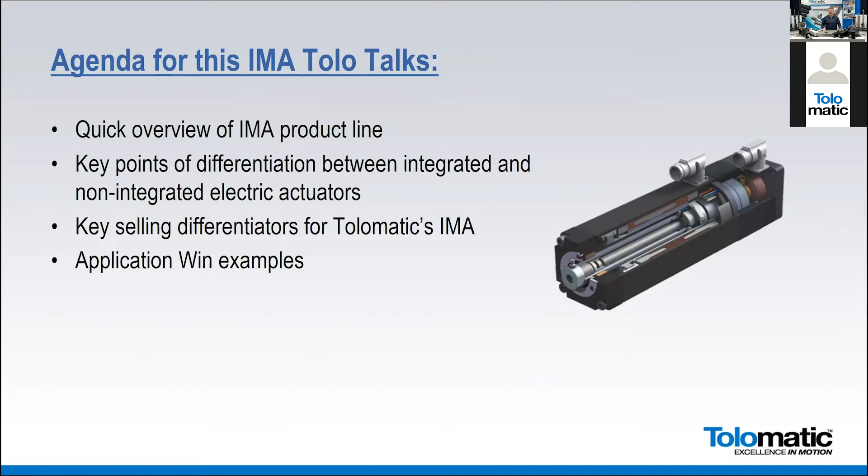So I'll talk to you about some of the differentiation points that we like to emphasize on our IMA. And then we'll get to the meat of it here, the things that you dialed in for, the application wins as advertised. So with that, I'm going to just get going here.

This gets you a nice overview of our rod style actuator line for the electric. You can see the ERD on the, I don't know if that's your left or right, but ERD started out as a very economical version. Then we added stainless steel, and now we have a hygienic line. We're going to actually launch a new line of those larger style hygienic actuators in the second quarter of 2021.

We're excited about that. The RSA on the other side actually has been a staple for us for over 20 years. So this is a tried and true product. We added the HT line about 4 or 5 years ago, and we've always had the GSA, the guided version of that. The RSX is what we've been focused on over the last 3 or 4 years. We built that out with our 80, our 96, and now just recently in 2020, we launched our 128, so we can do 50,000 pounds of force.

And then the IMA, we launched the IMA stainless about a year ago, and then we've had a white paint version that you can get, but we're going to focus primarily on the industrial version of that. So I'm not going to spend a lot of time on the hygienic options here around IMA. We're just going to focus on that top box there with the standard IMA product. IMA stands for Integrated Motor and Actuator.

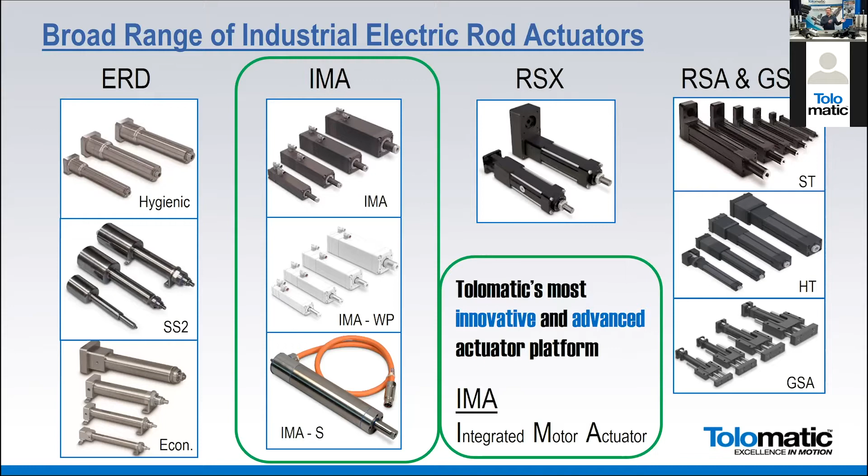So why is that interesting? If you look at the competitive marketplace for the non-integrated version, the ERDs, the RSAs, there are a lot of competitors out there. So there are a lot of folks that make a non-integrated actuator. Not that they don't make it as well as Tolomatic does, of course, but they do have a product offering. So there's a fair bit of competition.

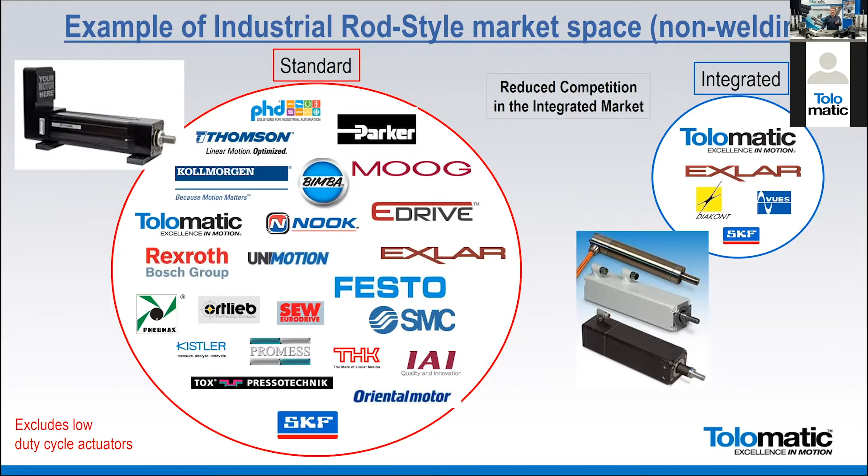But when you get over here to this integrated version, the pool gets a lot smaller. So your competition base is greatly reduced. So think about that when you're out in the marketplace. This is another good reason why you may want to lead with an integrated version, or at least put that option in front of the customer.

To just highlight quickly for you what's going on, our non-integrated version on the top, the RSA24, shows the actuator with that motor mount. This is a reverse parallel configuration, called an RP, reverse parallel. You could also put it inline, and then you'd see that it would extend out. So in either configuration, inline or reverse parallel, the size required for your customer to install it is quite a bit larger for our non-integrated version.

Now, it does give them some benefits. It gives them the flexibility of choosing whatever motor supplier they may want, right? There are also some features of RSA in terms of internal anti-rotate, things like that that are beneficial. There's some gear reductions you can do in the RP to help with your motor selection, maybe downsizing that. You can add a gearbox to it. So there's a number of flexible things that happen in a nice way with the non-integrated actuator.

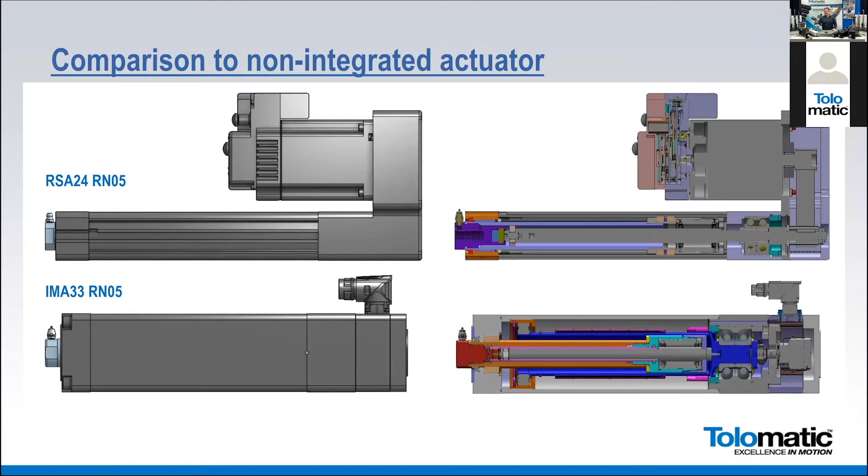But this integrated version puts that motor and that actuator combination in a very tight package. And so we use this on robot carried devices. We use this in places of hydraulic replacement where someone's trying to fit something into an area that otherwise really maybe wouldn't be able to accommodate something like this.

So why should I sell an IMA when I could just sell the RSA? You can double your sales value. That's why. So now, instead of selling the RSA and having customers supply their own motor to it to go on there, here in this case we have an opportunity of selling the actuator and the motor in combination.

Customer can still put in whatever drive solution that they're comfortable with. So if they like Siemens, if they like Rockwell, if they want to use even Mitsubishi, Nidec, etc., we've got a drive capability. We can set up this actuator to communicate and work flawlessly with those drive solutions, and have the motor and the actuator combination tied together here. It also greatly limits the number of competitors, as we talked about, and it's a very compact solution for your customer.

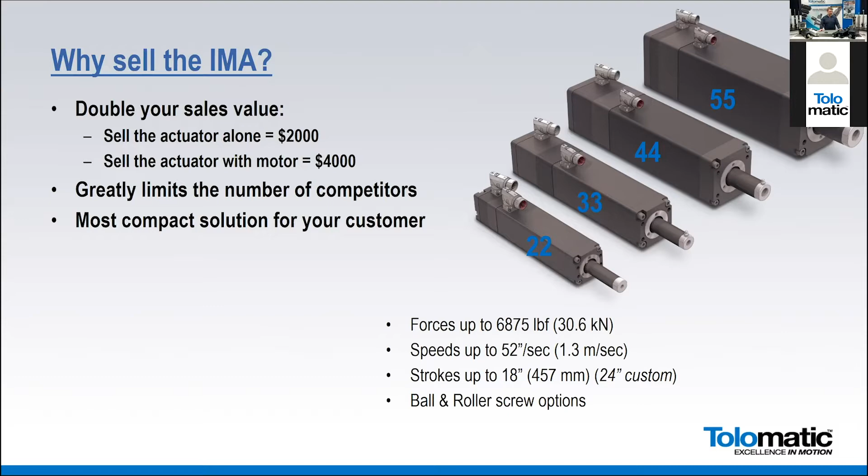So what's going on inside? Seems really complicated. I know this product, I think in general, is something we don't sell as much of because it is very involved. It's pretty complicated and a little bit scary. There's a lot of unknown and uncertainty that kind of makes us feel uncomfortable. So I want to try to demystify that.

Here we've got the servo motor. You can see the red and blue there. So you've got the rotor and the stator built right into the housing. So that's happening all right inside of this device here. It's heavy because of that. You got a lot of copper windings inside of here. But then retracting back inside of that is either a ball screw, or in this case, the picture that we're showing is a roller screw.

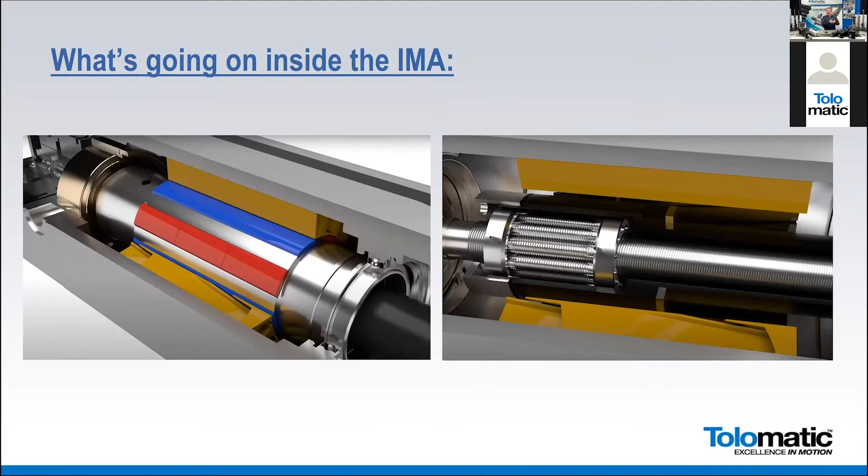So that roller screw is going to get connected to the thrust tube. It's going to extend out front here, and then it's going to retract back, and it's going to retract right back through the motor, actually. So those motor windings spin, and they're actually connected to the back end of the screw shaft, and then it drives that nut assembly with the thrust tube up and back and recessing it inside the motor, and that's what allows for us to make this very compact design.

I'm not going to spend a lot of time here. You can certainly pick this up and look for it yourself, but a couple quick things. We do build this both in a ball screw orientation as well as a roller screw. So if it's going to be price competitive, go with that ball screw. If it's something that's going to really work hard and be very high cyclic application, then looking at that roller screw technology is excellent. We have great deliveries on both of these, 3 or 4 weeks.

With a catalog product, 6 or 7 if you want to customize something, and we'll talk about that a little bit. A lot of different options that come along with that in terms of how you can mount this assembly. These are pre-engineered catalog options, so it allows you to add a brake inside of this. We can do some anti-rotate, a number of different rod end and mounting configurations.

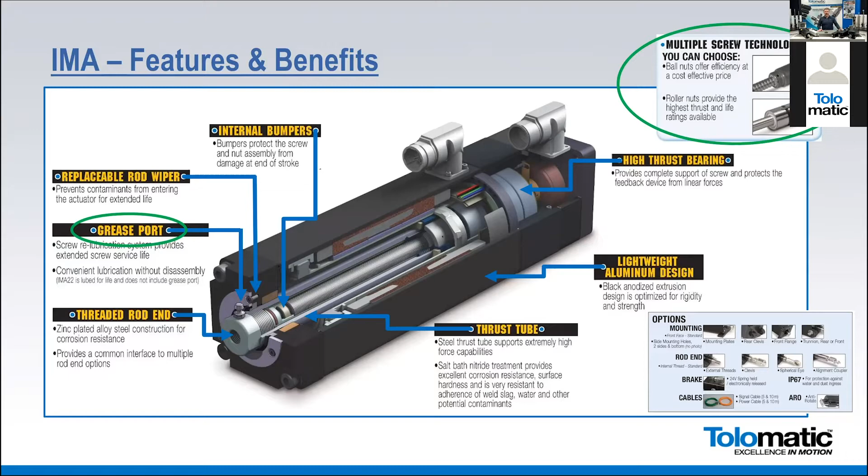So this is what makes this actuator, I think, a little more challenging for you to put out in the marketplace and sell. You say, okay, I've got an actuator, I've got a motor, but now I have to connect some sort of drive to this, and I'm uncomfortable with that step. And so what we're trying to do is make this easier for you.

So these are all the different servo drives and controllers that we have experience with. All of these could be mounted on a Fanuc, KUKA, ABB, or Kawasaki robot. We've got all of that worked out. Nidec drives, Siemens drives, Rockwell Automation. This is an Encompass product, and I'll talk about that a little bit. But we're working hard to make it easy for you to integrate with your OEM. Mitsubishi in particular we'll highlight. We're just in the final process of getting them to coordinate with us so we can use their drives.

We've got 2 applications out in California actually that we're working on, very excited about, with integration of a Japanese drive, which, if you may or may not recognize, can be challenging. A lot of that's very proprietary, and they don't play nice with others all the time. But in this case, we've been able to get our 2 companies together and work out the differences. So a lot of capability, a lot of flexibility.

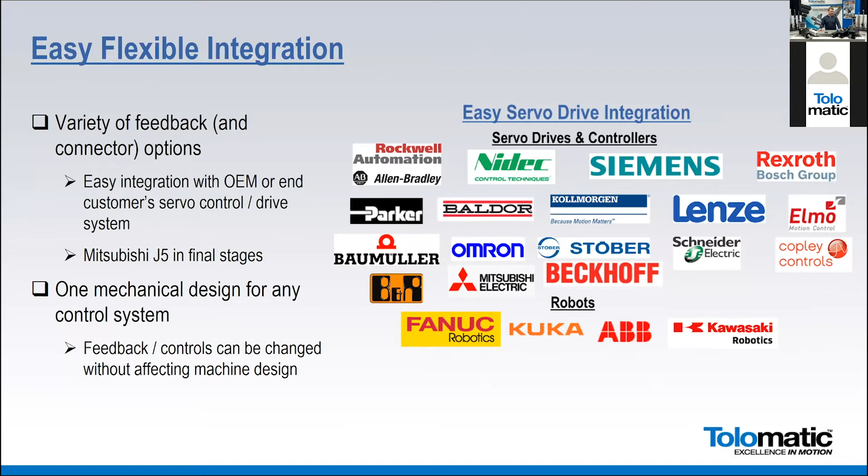Most of your customers are using one of these sort of drive solutions and control solutions that I'm showing on the screen today. So how do I get help on that? I'm confused. My customer is concerned. Go to our website, find our IMA page, and then click down and you see we've got this Drive Integration Resource tab. You click on that, it pops up this open screen that you see on the other side.

Here we have all the integration information you need, and we're starting to build this out. We just added this a month or 2 ago, so you're going to see more and more of this. Our product manager, Mike Wolfel, is working on it. We've got a lot of good information on Rockwell. We do a tremendous amount of work there, and they have 60+% of the market in North America. So here's a case where you could sell to a customer that prefers Rockwell, get the motor solution and the actuator, and then allow them to get the drive and the controls and everything else from their Rockwell provider.

Here, Siemens drive integration, we've got a lot of that worked out. Nidec, and I'll talk about that in just a minute. We've got some interesting options for you there. And then Mitsubishi is coming soon. We're working out the final details. That should be added in the next month, maybe two. So, all right. The Rockwell Automation we talked about here. The seamless integration with Kinetix servo drive.

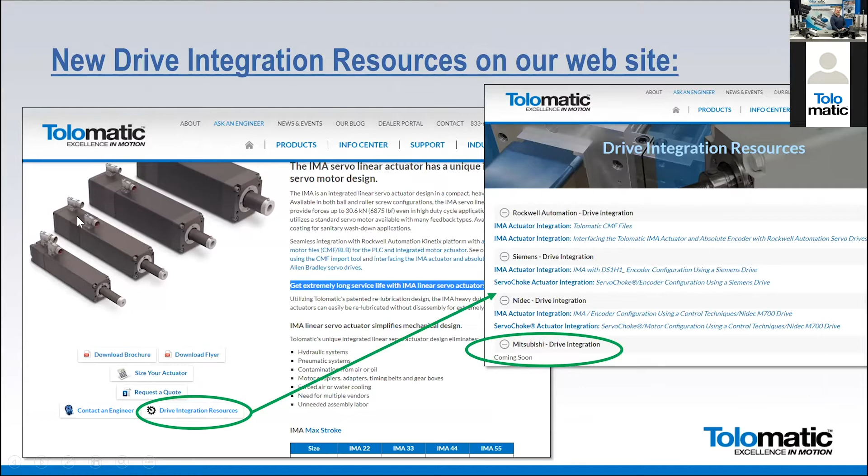So something that isn't maybe as apparent, you can look here. You see all of our pictures have two connectors on the back end. One's a power connector and one's a control connector, the drive feedback information. Now you come here and you're seeing a single connector. A number of the drive manufacturers are now offering a single connector option, and we have done that already. It's already pre-engineered in our Rockwell configuration. This is available only from Tolomatic at the moment on our IMA product with a single connector. So a point of differentiation.

We've also got stroke configurable. So if they wanted 4 inches, 9 inches, or 10.5 inches of stroke. These are differences that can help separate Tolomatic from some of the competition. Exlar is going to try and sell them in fixed stroke lengths. Exlar has the 2 connector right now; they're working on the 1 connector. This is another way of differentiating and showing them that we have an Encompass partnership. These are Rockwell enabled. These will look like Rockwell motors in their drive software. So none of your customers should feel uncomfortable connecting it to a Rockwell drive, getting it up and running very quickly and easily.

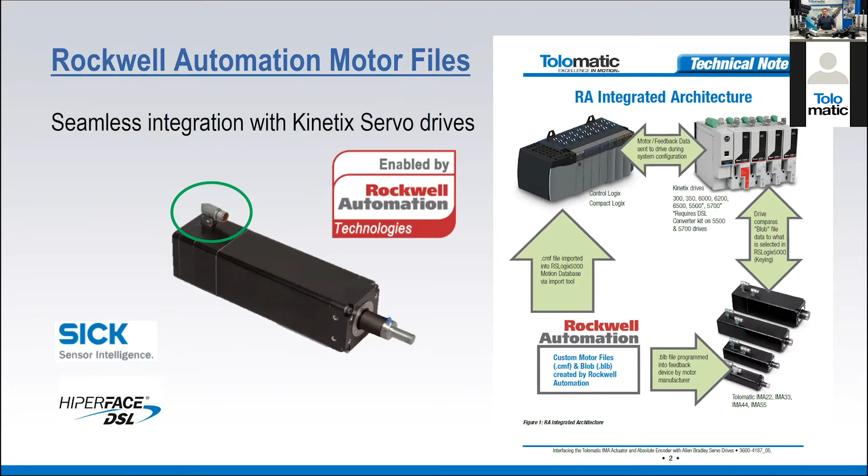So, all right. Nidec. We haven't officially announced anything here, but we've got a partnership that we started forming with Nidec. They're allowing us to resell motors and drives for our actuator solution. So if you've got a non-integrated actuator, we're going to connect a Nidec motor to it and have a drive run that solution. And if you want to sell our IMA and you want to get the drive solution, we can work with you on that as well. They have a new software that they launched, similar to what they used to have, called EZ Motion. Our applications engineers have been trained on that, and we've got some documentation to help you make that simple for your customers.

And that EZ Motion drive with Nidec used to be Emerson, used to be Control Techniques. It's been through a couple different acquisitions. So your customers may recognize Control Techniques and feel more comfortable with that. It's a Control Techniques drive sold through Nidec. We can help them integrate that, and then they can send it to whatever PLC solution they want to use for controls. So now you not only get the actuator and the motor, you can also add the drive solution to that.

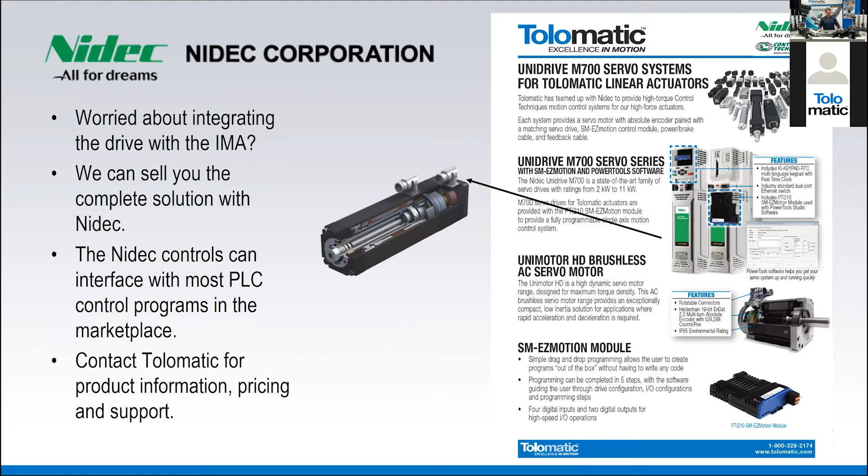Just a couple key points of differentiation that I wanted to highlight with you. Our actuator looks similar to the other 2 to 4 competitors in this integrated actuator space, but there are a couple important differences that I wanted to highlight with you. So part of it's this skewed versus segmented stator winding. I'm going to talk through that in a little bit more detail. We have a low electrical time constant. I'll talk to you about that.

And then I don't have a slide. I took it out just in hopes of being on time here. But we do offer our standard roller screw and we offer ball screws. We do not offer inverted roller screws. But if you do some research, our ball screw dynamic load rating is very similar to our inverted roller screw dynamic load rating. So the life expectancy you're going to get from these 2 products is going to be very similar. And we've had a lot of success converting inverted roller screw customers over to a ball screw and getting essentially equivalent life in their performance.

So just a note to help you navigate going forward. Or if we need to get a little more aggressive on the standard roller screw pricing, we can explore that too, since Tolomatic's been making our own roller screws for the last 7 years or so. We've got that core capability in-house. Other things you want to make sure that you highlight with your customer, you're not going to get this product from anyone faster, right? So we can ship these in about 3 or 4 weeks as standard. That's a lot faster than most of the competition.

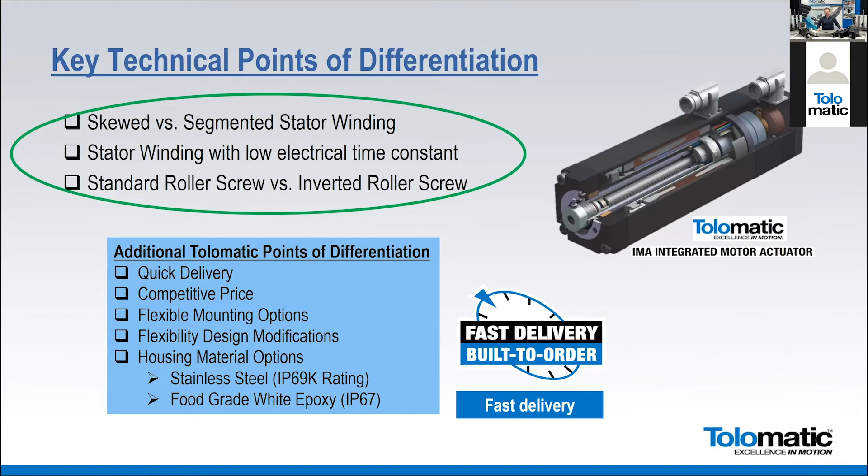Competitive pricing, we have a lot of experience putting this up against the competition. We know where the market's at. And our pricing is competitive on these. Got a lot of different options here that we've talked about. And then we've got, of course, if you're in the food or a pharmaceutical application, you can move them towards this white paint type of solution, or our new all stainless steel integrated motor actuator solution that we launched about a year ago.

It's a little more expensive, it's a little bit longer, but it's going to give you very repeatable force. So any sort of pressing applications, any sort of applications where accurate force and repeatable force is important, the IMA has a huge advantage over the competition. It also results in what we call low cogging torque in terms of the amount of energy that's required to get it moving back and forward. It's not finding those gaps between the different stator assemblies.

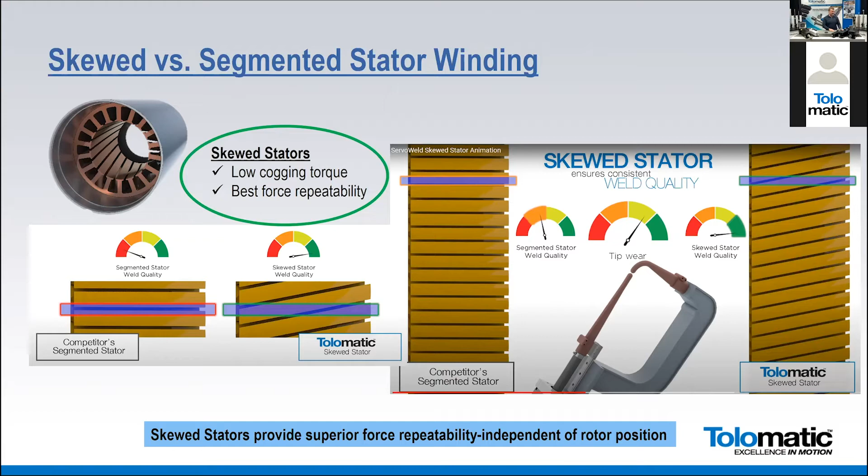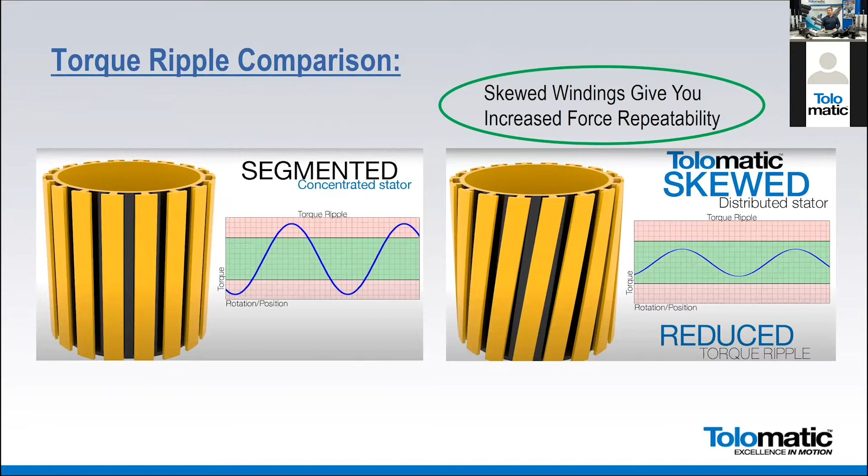It also gives you this force repeatability, and we talk about torque ripple. So as you're going between those stators in this segmented version on the left-hand side here, you see where that torque ripple is more exaggerated. Now, as you skew those windings, you have a much more common and even predictable force coming out of that motor. You really reduce that torque ripple so that you're getting much more consistent force out of this motor across the entire span of the application. The last piece I want to highlight for you is this electrical time constant.

I'll also say Exlar has been a competitor of ours for a decade or more. They have shifted their focus in the marketplace a little bit, and I would encourage you to look for some of those accounts where Exlar traditionally had that business. You may have opportunity to convert them. Their lead times have gotten a little longer, been some price increases. There's been a focus kind of moving away from industrial automation more into sort of defense and aerospace. And so with that, there are some customers that would potentially be open to a new solution there. I encourage you to try and explore that with them.

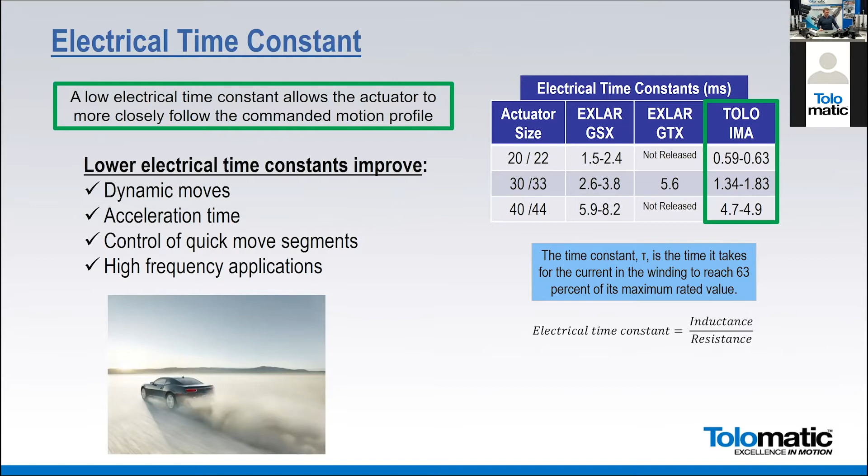What that does is you unscrew that, take it off, you put a bit with a cordless screwdriver, and then you can actually retract and extend the actuator without any power applied to it. So you have the ability to create movement. This has been really important. We'll talk about a security barrier application in a minute. Having the ability to move that actuator if power is lost is key, or to use it for setup and things like that.

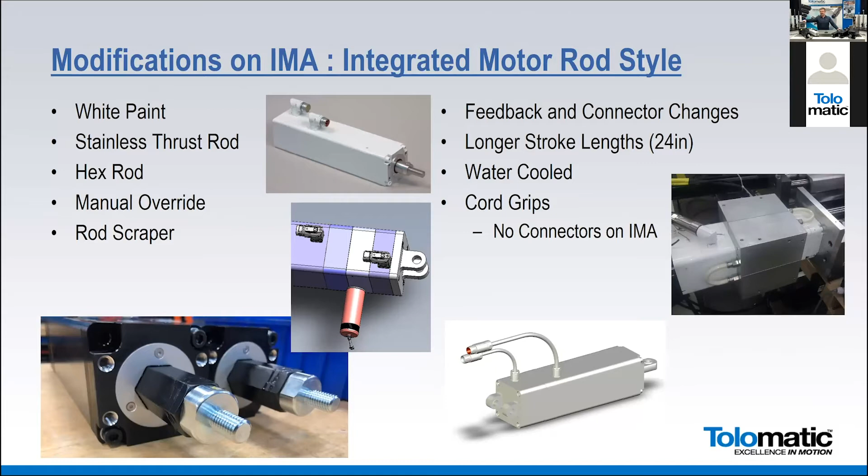And with that, we're going to get into some applications. And I picked 6. We've got 20 or more different applications, and I think you've heard a number of them in other Tolo talks. So I wanted to try and pick a few newer ones. We've got some pharmaceutical ones, some medical ones, et cetera. I focused here just on some of the more industrial sort of applications.

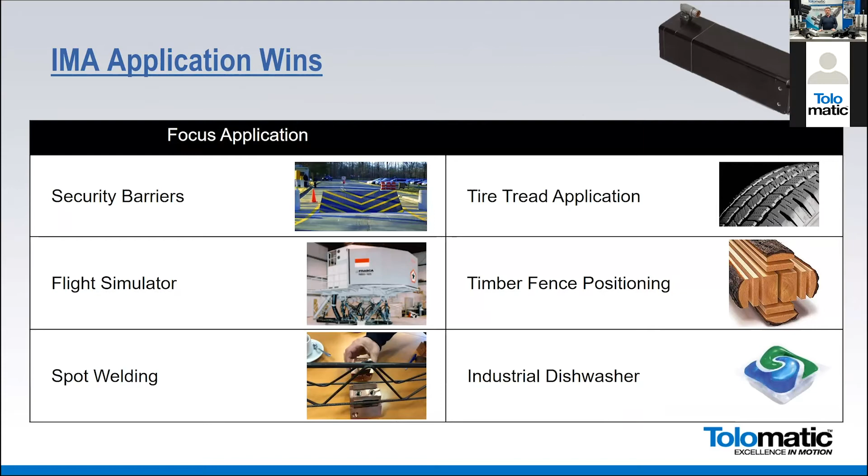So security barriers, and we actually have a really strong position here, and I think this is applicable in other areas as well. So think about this is an actuator that needs to move very fast. This is an application that's been done traditionally with hydraulics.

It has to be a command in motion, and they also need the ability, this is where that manual override came in. If they lose power to this facility, they still need to be able to get this up or down on a security barrier. So we've seen a lot of motion there. It's also kind of in a wet environment, somewhat outside. So we've done some things on some new designs with some steels, coatings, et cetera, worked with folks on that.

So there's a lot that we have to offer here. We're one of the industry leaders in these security barriers. It is a little bit smaller market, but lifting gates up and down, time is essential. It's a hydraulic replacement application. There's a lot of life cycle testing that goes on here. It's really important that this is a critical application. It's a lower duty cycle, but it's critical that when we need it to go, it moves.

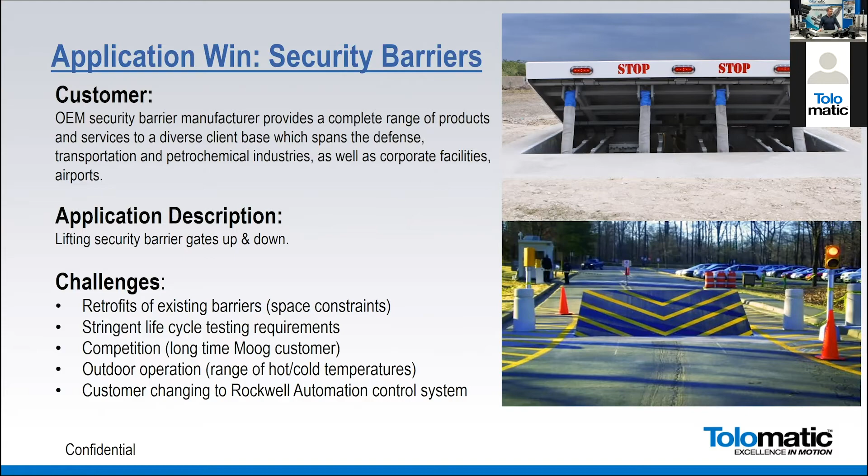And in this case, as you think about hydraulic replacement, one of the driving things here was the concern with hydraulic oil leaking out of the system at some point if there's an event, and then getting into the ground. The other issue was cold and heat. So hydraulic systems, you get up into Minnesota here, freezing temperature operates a lot differently than when you're down in Florida. And so with the electric solution, now you can take away that difference in viscosity that you see in that hydraulic fluid between a freezing cold environment and a tropical 70-degree environment down in Florida, which sounds lovely at this time of year to all of us Minnesotans.

So in this case, we came in, we've worked with a number of different customers successfully and displaced hydraulics. We've displaced some competition. This compact design works great because it fits in underneath this assembly. The roller screw gives them the long life. And speed is really important here. So being able to respond quickly and then drive fast up to full extension to get that gate up is really important. So we added that manual override and then a brake option as well. As soon as it's up, we apply the brake so that that stays up and you don't have to keep power to the motor then throughout the up period of the security barrier.

So think about that for other applications as well. If you're going to move to a position, a standard brake option here allows you then to hold in place. It's a holding brake, and allows you then to de-energize the motor at that point. So I'll let you read through this, but we actually do, I bet, close to $1 to $2 million a year with different customers in security barrier types of applications. So really good stuff.

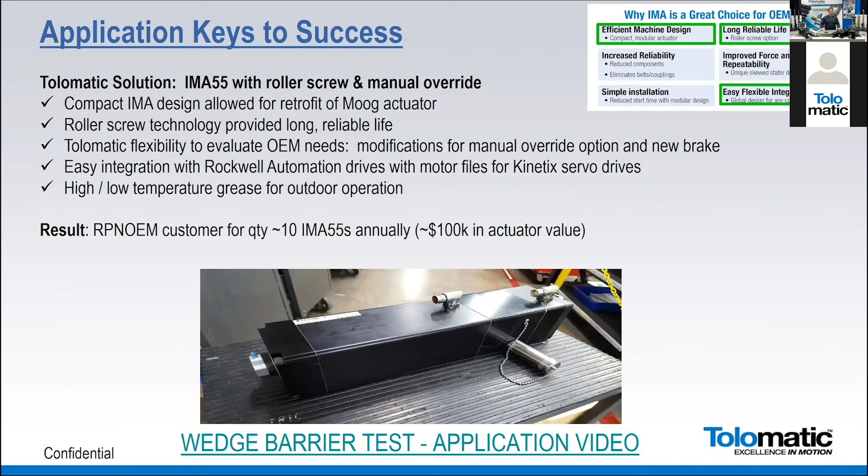Here's an application that's a little bit unique, and I don't know that there's a lot of helicopter simulator applications out there, but think about high frequency applications. Do you have a customer that's moving something very rapidly, okay? And we've done some work with customers that have testing. They're building testing types of equipment. We've done things with people in entertainment, with rides. We've done things with people here in simulators, both helicopter, car simulators, etc. Anything where you need quick, rapid movement and frequent movement.

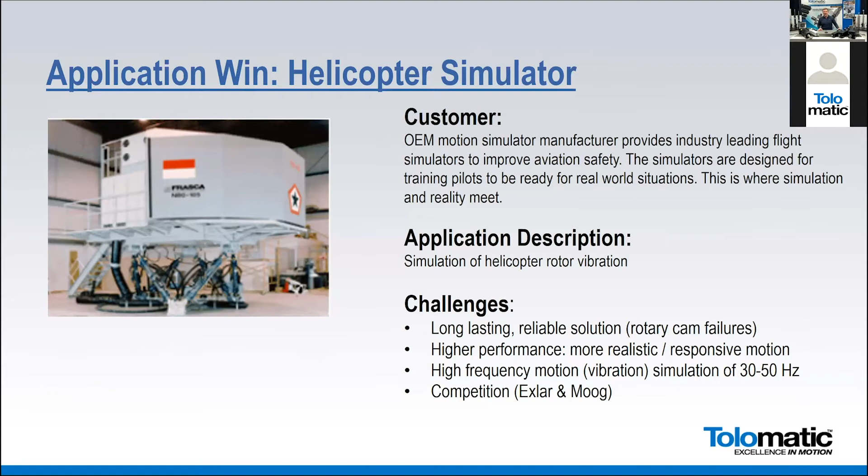And they had done it with a camming assembly before, and it just wasn't working very well. They weren't getting the realistic performance and feel that they wanted. They did both testing with us and our competition. We're the only one that survived the test. We designed a bit of a customized unit for their environment, and they've been a customer for years now. Really successful. They're getting very long life, longer than we expected on these actuators, which is unfortunate. I'd love to sell them a lot more replacements than I do, but the simulator business is going well, and this has been a great solution.

So we took our IMA and put a preloaded roller screw inside of it, such that you're not getting any sort of movement on the nut on the screw assembly. We have a special drive for sort of a vibratory environment, and this low electrical time constant here enabled that dynamic movement back and forth. We've done some things with road testing, we've done some things with vehicle testing, body testing, etc. A number of applications here. Think about high frequency, high cyclical moves.

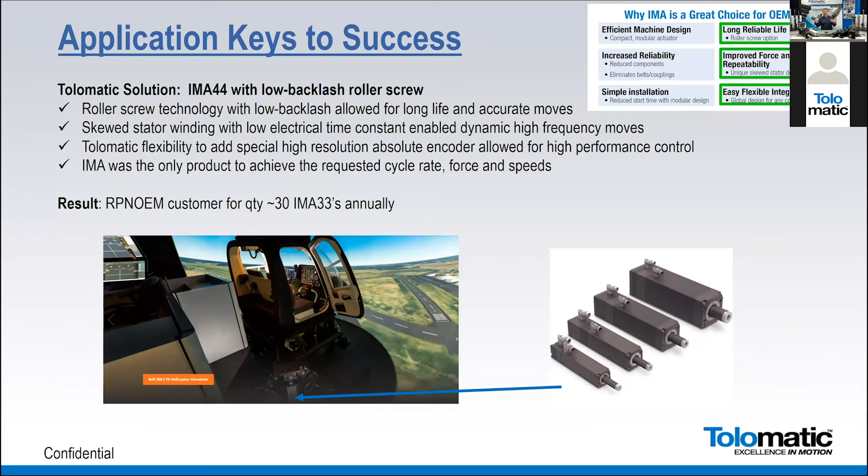So another win here. This is a welding win, and this design, this IMA, is the same as our servo weld. So we sell a robot-carried resistance spot welding solution into the automotive marketplace. We're on spec with General Motors and Volkswagen, a few other companies. And we took that technology 10 years ago, put it into an industrial version. So all of our IMAs can be robot carried.

So if your customer is going to put in a FANUC robot to do something and they need a clamping, they need a pinching, they need some sort of tooling on the end that's going to provide movement, our actuators are great for that. They're set up perfectly to do that. In this case, this customer is making this tie assembly, this construction wire that goes inside of some of the concrete that you would pour and form then for bridges, barriers, things like that.

They had been doing it hydraulically. They wanted to increase some of the quality and the output of their factory. They weren't getting things always exactly the same. The hydraulic would move to wherever it moved depending on the amount of force in the hydraulic fluid, and then they weren't getting consistency. So we won this business about a year and a half ago.

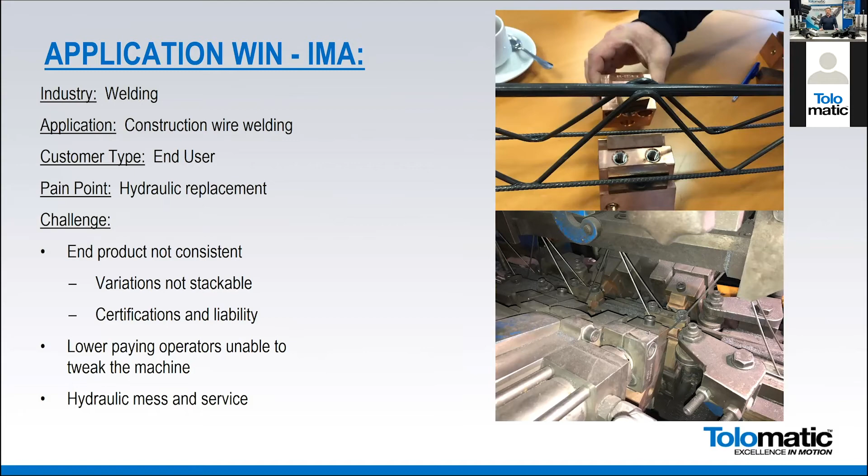They're looking at doing another line. They did one of their machines. They wanted to have a simpler design so that it was easier for their operators to set up. They want to get away from the hydraulic solutions that they've been using. And so we worked with them very closely to help them specify the IMA and explain why this created a better solution for them.

So we were working against a company that is actually Russian-based, this Diakont company, come out of Russia. And we were able to show that our speed and force repeatability, we talked about that skewed winding, really comes into play here. You're going to clamp and push and press at the exact same amount. So envision a servo press sort of solution here. You're doing a pressing application on the wire and then doing the weld itself.

So we worked through thermal modeling on their discussion. We were able to integrate this Lenze drive that they wanted to use. And then we also offered a cooling plate that could then help them keep this cool, because this was a pretty dynamic move. They were doing this pretty frequently down their welding line.

So customer loved it. They were able to get one system completely converted over. They've been running it for 6 to 12 months now, and looking at moving other lines in their facility over to this solution as well. So again, a servo pressing application. Happens to be in welding here, but certainly could be applicable to a number of other areas.

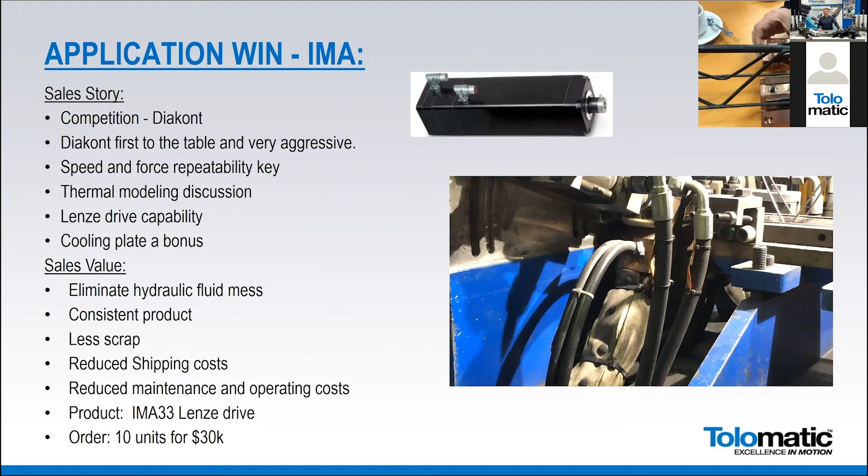Tread application. Tire industry, you wouldn't always think about that as a key growth area for us, especially in the middle of the pandemic of 2020. Not as many miles being put on tires, but some of the tire manufacturers have recognized, look, it's going to come back. Now is the time for us to do some investment. So we've done a few projects this year with tire companies, and we have more that we've been actually working on.

So this is an interesting area, a very traditional business where they've used a lot of hydraulics, some pneumatics for years and years, and they're starting to try and upgrade some of their existing equipment. There's not a lot of new tire plants being built, but there are a lot of upgrade opportunities inside existing tire facilities. So again, this could be applicable to other sorts of industrial environments.

So in this case, they were using pneumatic actuators to apply the tread to the tire casing, but they weren't getting the exact force. There's a little bit of difference every time, depending on the amount of pressure that's exerted, the temperature, the frequency, the seal wear, things like that. So they also wanted to get a record of that force being applied. So you could do that potentially by adding a load cell to your pneumatic actuator, so you get a digital signature or imprint of how much force was applied.

But in this case, you could use the IMA. Now you can take that motor information and you can extrapolate that back to a force. And now you have your digital fingerprint of every single press that you've made. You know exactly how much force was applied. So we were able to work very closely with them to replace their pneumatic cylinder with this electric cylinder. So benefits for them, a much better product, so higher quality.

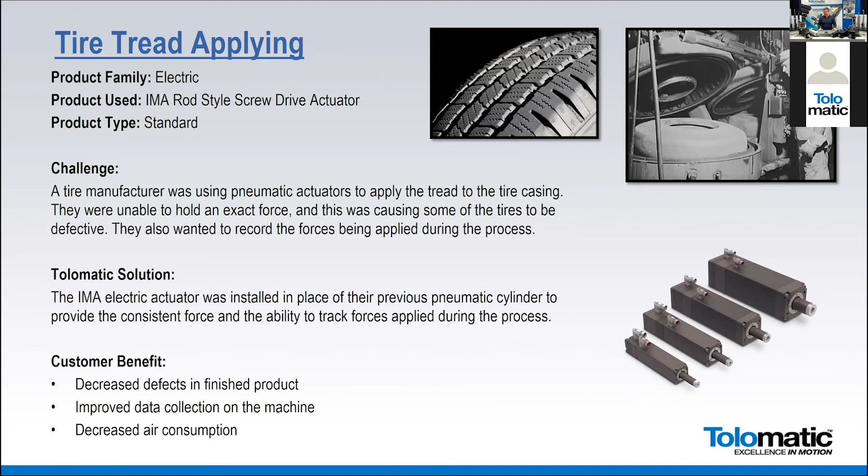Here's an application. Everyone has been thinking a lot about paper products in 2020. That goes from toilet paper to your Amazon box that's shipping to you, and everything in between. We are using more paper this year almost than any other year before, I think. You've got takeout boxes. I know we have pizza boxes and all sorts of things coming through our house, things being delivered every day. The paper processing industry and timber is going strong, and thank goodness, because we're all making

use of that. But it's also another industry that historically has relied on hydraulics. And here they're actually doing some investment, especially in the Southeast and in the Northwest, creating new electric solutions to replace some of their pneumatic and hydraulic solutions. So in this case, we worked with a company.

So it needed to fit right where the hydraulic solution had fit. So you hang another servo motor on this thing, and it would be, with this non-integrated version, a little too big and stick out in the wrong places on their equipment. So they like the compact design of this IMA. So we worked with them. Again, a 7.87-inch stroke, speeds that were pretty quick here, 10 inches a second, and pretty good thrust at 200 pounds.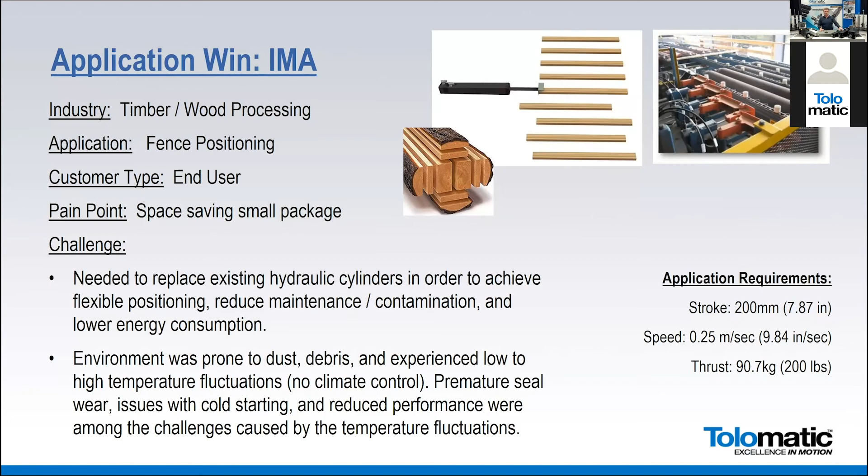You don't have any extra gaskets or seals with this motor solution as on a non-integrated version. And then they're having some issues with seal wear on the hydraulics, just because a lot of these timber applications are in environments where they do get cold. So temperature fluctuations were a challenge. I went up, I need to go back down.

So, our distributor brought this application to us. We worked with them to understand the motion profile, exactly what was happening in the environment. We were able to determine that in this case, a ball screw would work just fine. They wanted a quick move, not a lot of force. Put a 5mm ball screw in there.

We were able to improve their throughput, a more consistent and repeatable design. Took their operating costs down. Took away that hydraulic concern, and then we're able to solve this more efficiently than the hydraulic solution they had. And in this case, we put an IP67 option. So we've got IP65, we've got IP67, and then on our stainless we even offer an IP69K if you have a washdown environment.

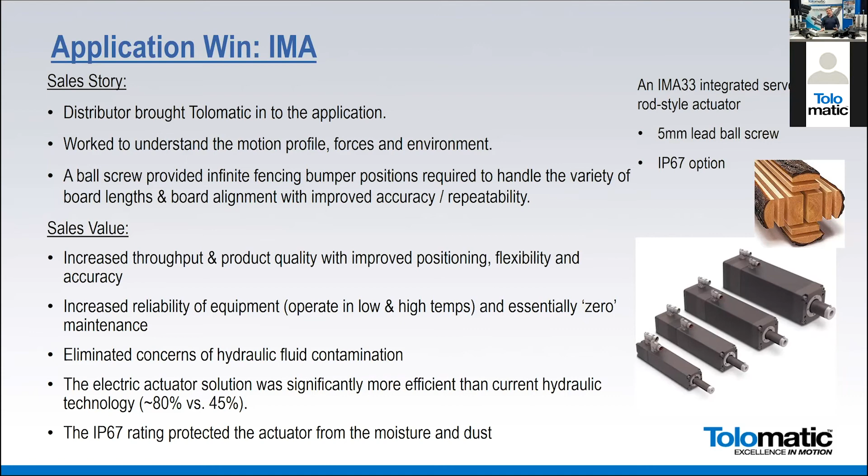I don't know about your household, but we've been going through a lot of dishwasher fluid and pods here recently as we eat at home a lot more than we maybe have before. And this company here worked with us to create a new solution for their dishwasher filling and sealing pod manufacturing. So in this case, they had a confined space. Obviously, this is a manufacturing assembly area, and they didn't have a lot of room to maneuver inside their equipment. So they were building a piece of equipment that they then sell to other places. So you got an OEM sale here.

So this is, once they've standardized this design, the gift that keeps giving, our repeat part number OEM type of customer we love. But they needed to fit into the solution. An integrated version fit the bill. This non-integrated version was not going to fit into their machine design, and they wanted their machine that they sell to be as small as possible. They also wanted the automation that Electric brought them and the consistency.

So we contacted them. We tried a different solution. We tried an ERD, a non-integrated version. I guess fiasco is the word here. And then they visited a competitor, and they saw some of the things that they were doing. We came back 2 years later with them, brought this integrated version, which we thought initially was going to be too expensive, right? So we lead with a less expensive option for the customer.

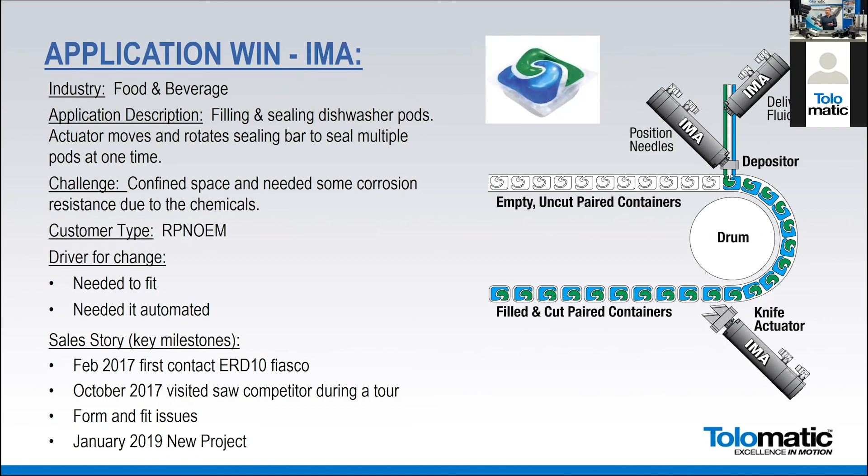And sometimes we do them a disservice by not showing them a few different options. So I encourage you to think about not only a less expensive, but maybe a most reliable, and then be able to have a conversation with them about the trade-offs and benefits of both. So in this case, we were able to kind of fight our way back into the solution. We're able to beat some of the competition based on better delivery, some flexibility in the design, and some of the integration work that we did here.

In this case, we've got this white paint version that's got a stainless steel thrust tube on it and some higher ratings for washdown. And we were able to marry that with our standard industrial design. So you kind of form a hybrid here. We took the stainless steel rod and the fasteners, and then we put that back inside of this solution here, and we added our grease port on the end of the thrust tube so that you can easily grease the internal roller screw or ball screw in this assembly here.

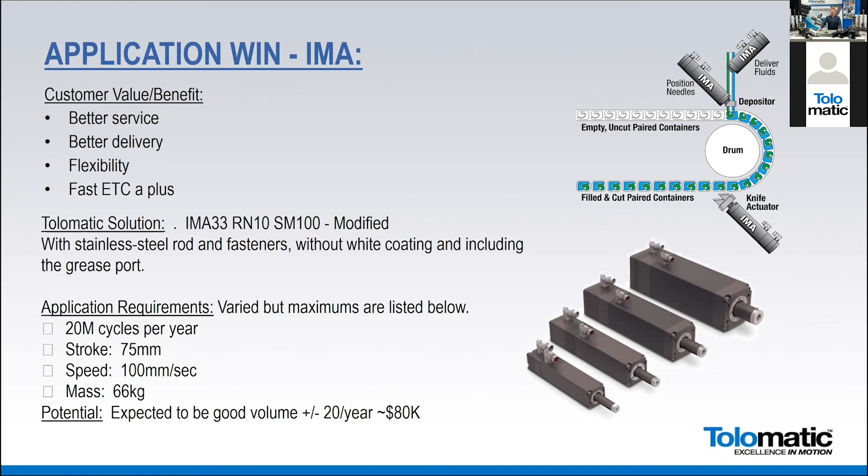So a lot of things that we did to sort of create a hybrid, semi-custom solution for the customer that then fit their needs. So very exciting, great application win. Fun to have a customer in this sort of space. So as I wrap things up, last couple slides, why is IMA a great choice for OEMs? This repeat part number OEM, I keep asking you to go quest and find more customers for us. It really creates this compact actuator motor solution that is great for fitting inside a machine.

There's another customer that makes a form, fill, and seal device for medical applications. They have about 10 of these designed into every single machine, but they wanted the machine to be as small as possible. So when you're working with OEMs trying to build that machine, doing this allows them to reduce that footprint inside of their machine, which is a huge benefit for them and their eventual customer. I've got a lot of long life here that you can get out of the roller screw options in here.

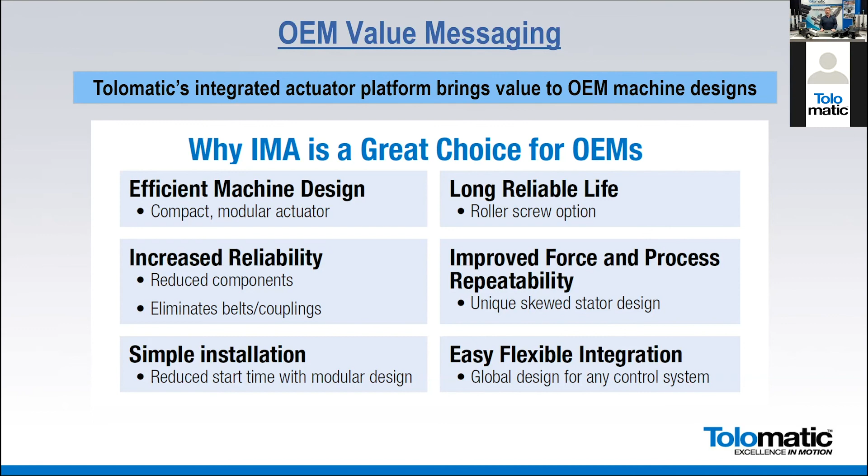Fewer components, right? You don't have a belt here. You don't have any sort of gearing. You don't have pulleys, assemblies. You don't have gaskets. So you have a much more simple solution with this IMA than a non-integrated. And with some customers, that resonates. Very simple to install. That repeatability we talked about, this skewed winding and the benefits that brings, and this low electrical time constant for a responsiveness that you can't get from any other actuator out there. And then easy to integrate. So lots of things that you can put in front of your customer.

And as I've talked with a couple of my sales guys, we love everything that our distributors are doing with us. We're seeing really strong sales growth here in the fourth quarter, and we're excited about 2021. But we also know that we continue to struggle a little bit with this IMA and presenting it appropriately with customers. So we agreed that coming in Q1, we're going to launch a sales challenge to our distribution network in terms of how do we sell more IMAs. And I'm open to ideas. If you have things you want to send to me, I'd welcome that.

But we're going to put together some incentives here, and we'll announce that at the first of the year to try and help encourage and reward people for presenting the IMA as an option and trying to get a little bit outside your comfort zone and think about taking a solution to the customer. That doesn't mean you have to sell the IMA alone. We can certainly represent both products. Let's give them some options, but we want you to be able to knowledgeably present both of these options to your customer and then have a discussion about that. So look for that coming soon.